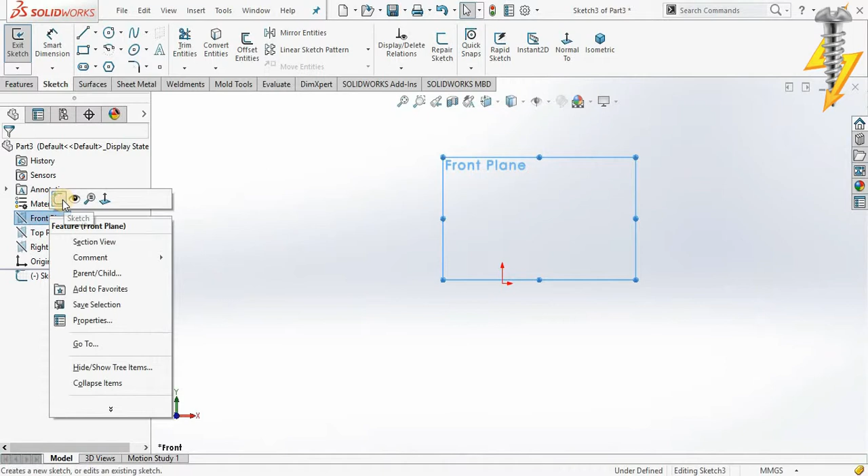After that, we're gonna draw the half shape of the mug, choosing a line and spline.

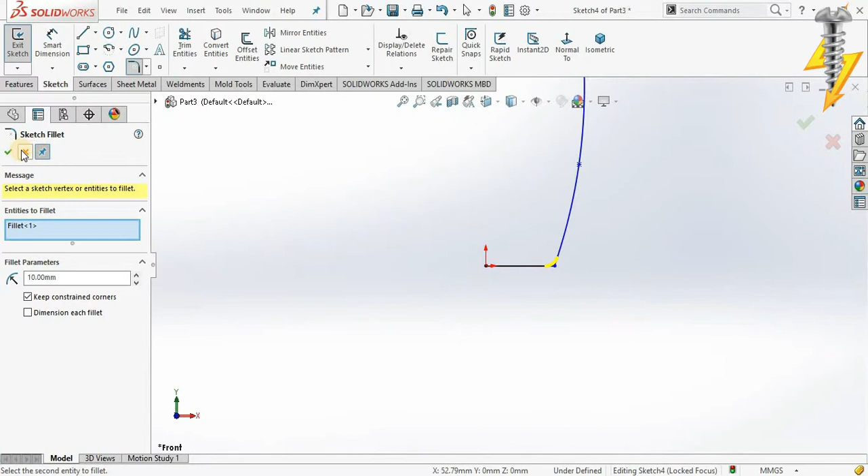We add the fillet here, then we go to the Surfaces feature. Now before that, we should make an axis of revolution.

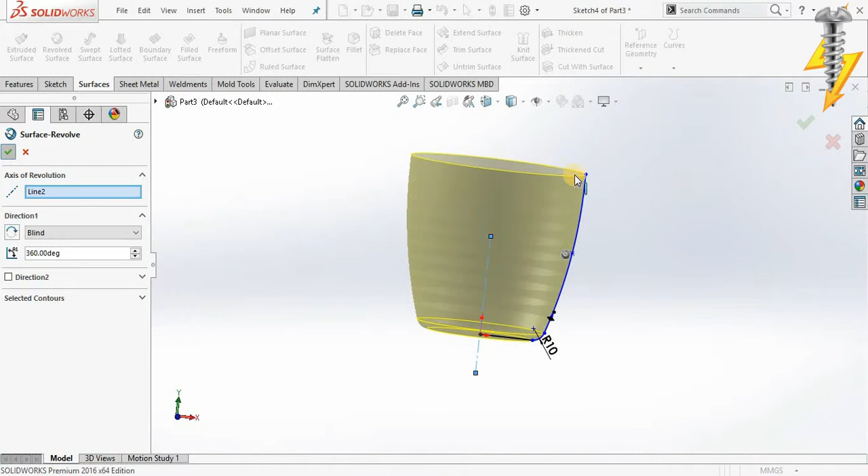To guarantee that the feature will work. Now we have the shape of the mug, but without the hand holder. What we're gonna do right now is add thickness to our design.

For example, 1.5 to the surface. Gonna be looking like that. Not bad.

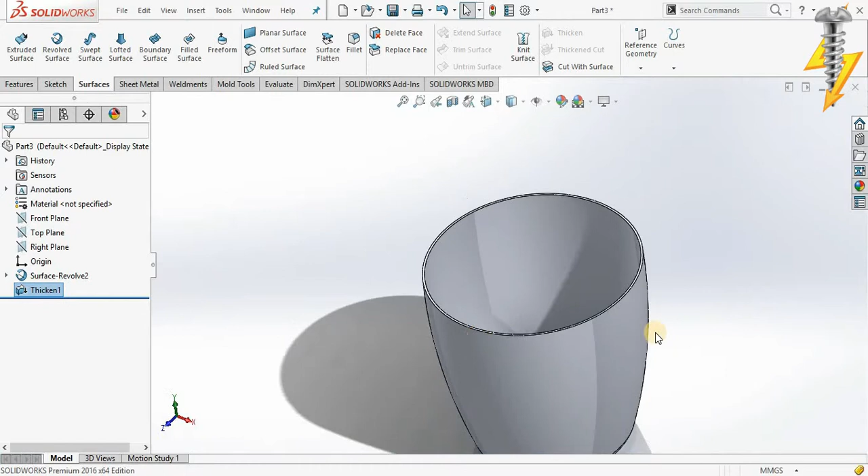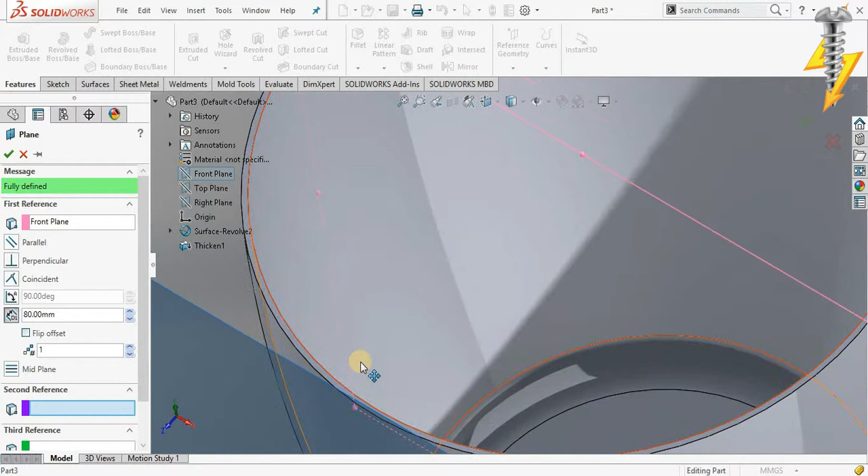Second thing, we're gonna add the reference plane. It must touch the surface. We're gonna know why after that.

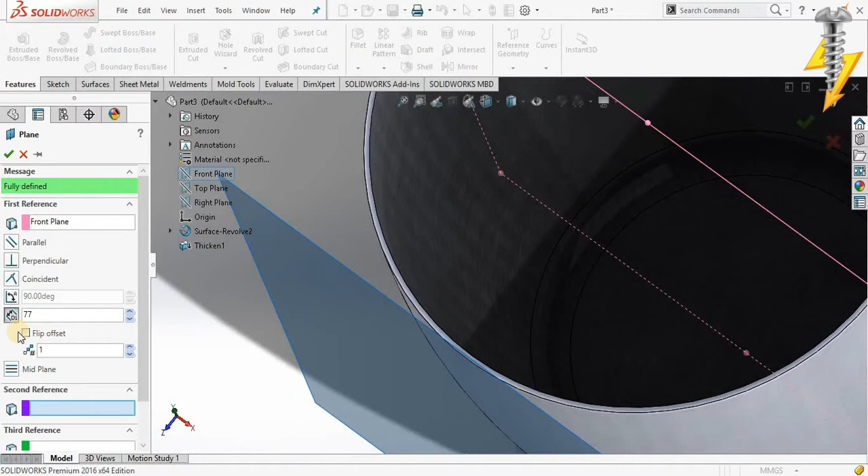17. Too much, 77. Is that okay? Not okay yet.

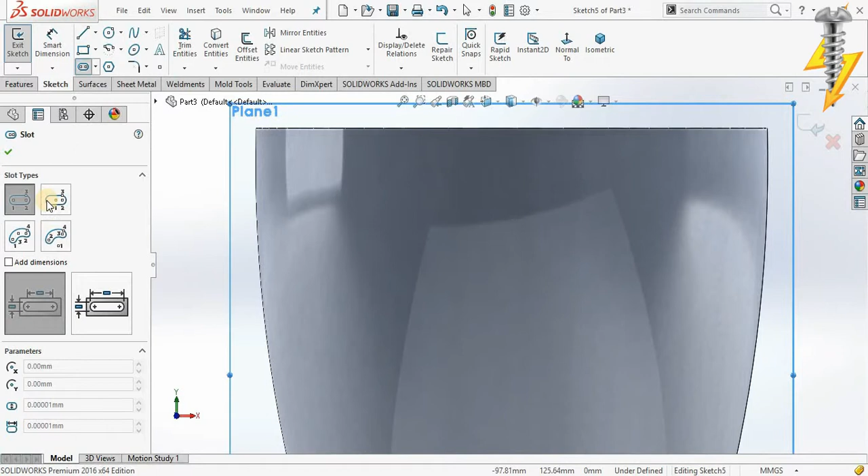When it touches the surface, I'm gonna open up Sketch and draw the shape of the hand of this mug. What we're gonna do is draw a slot from the center, like that. We go to Smart Dimension, we set 15.

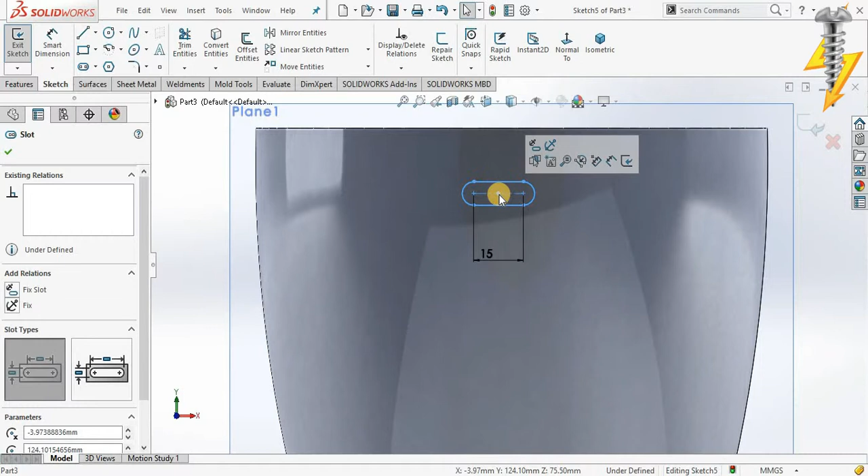We draw an axis, like that, and make this axis vertical.

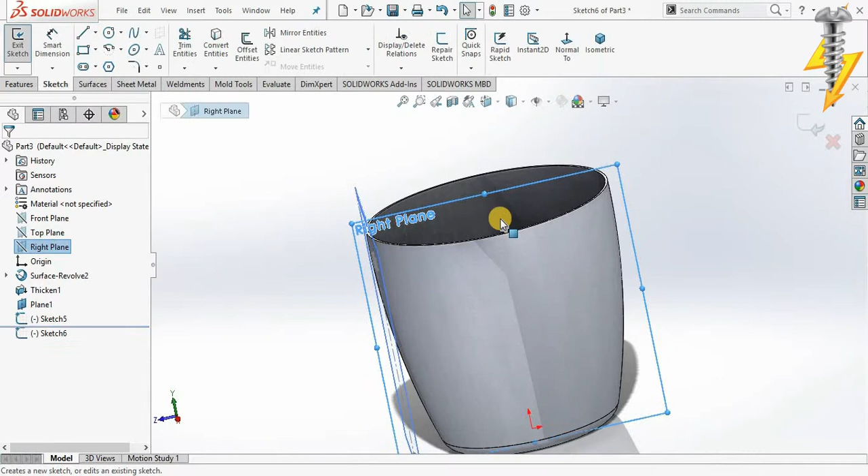The second part is to go to the right plane and draw a spline that gives the shape of the handle. Then make it coincident, like that.

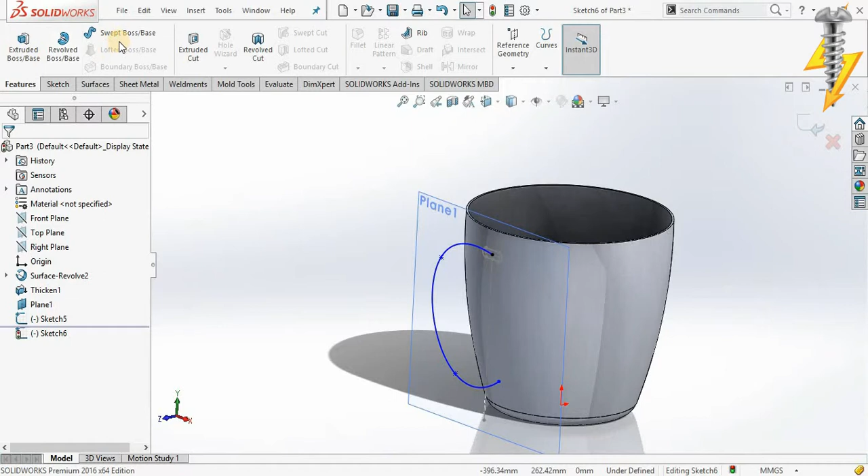Now we go to Features, Swept Boss. We select the profile, then the path. The result will be like that.

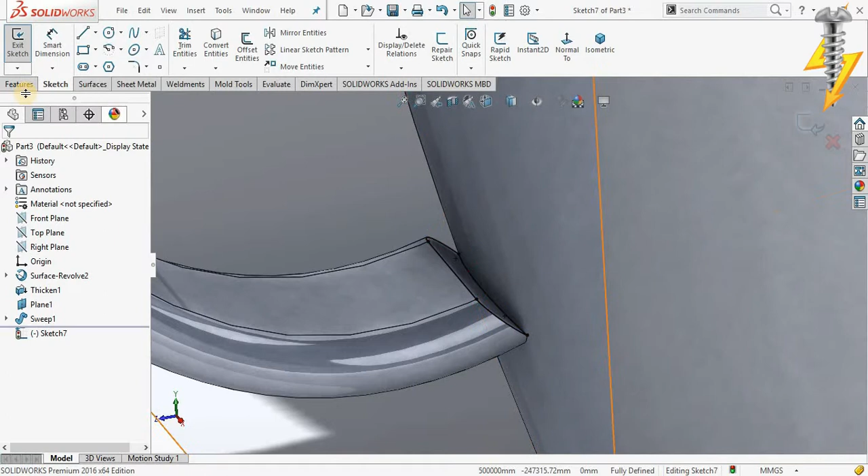I guess we have a little problem here, but we're gonna solve it by opening Sketch, then converting our entities, and we go to Features, Extruded Boss, and set it up to Next.

We set it invisible, hide it. Now we can add the fillet here by this amount.

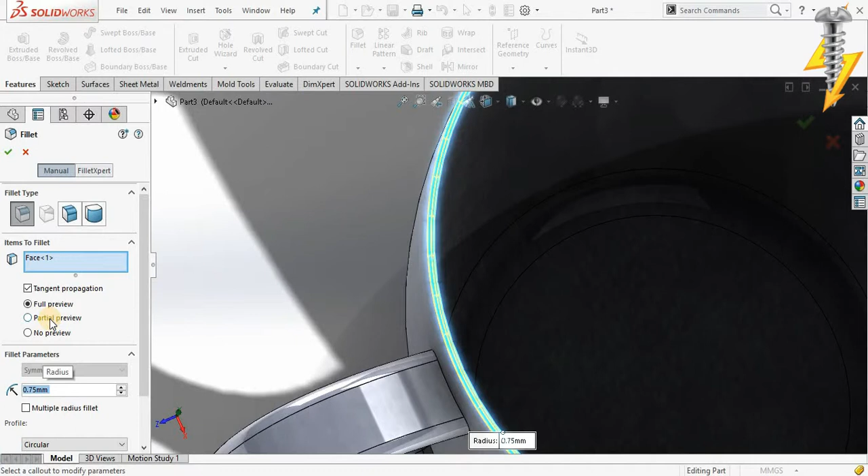And now we are okay with the mug. We can edit our color.

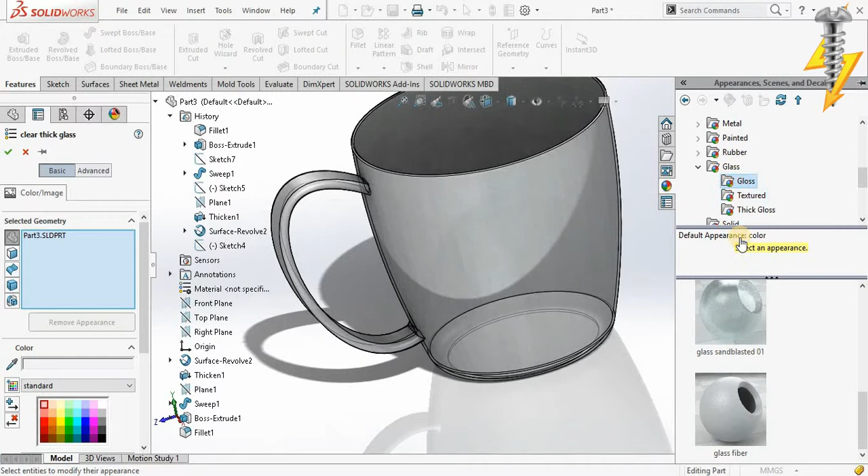We can increase graphics by removing this and adding a scene.

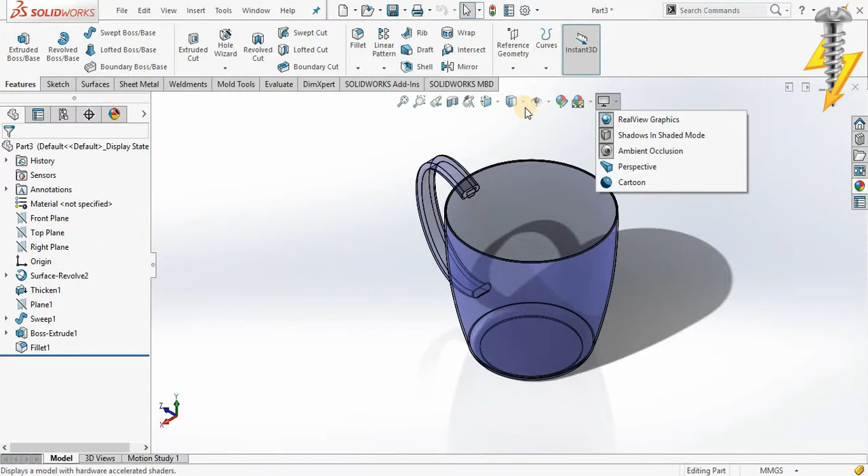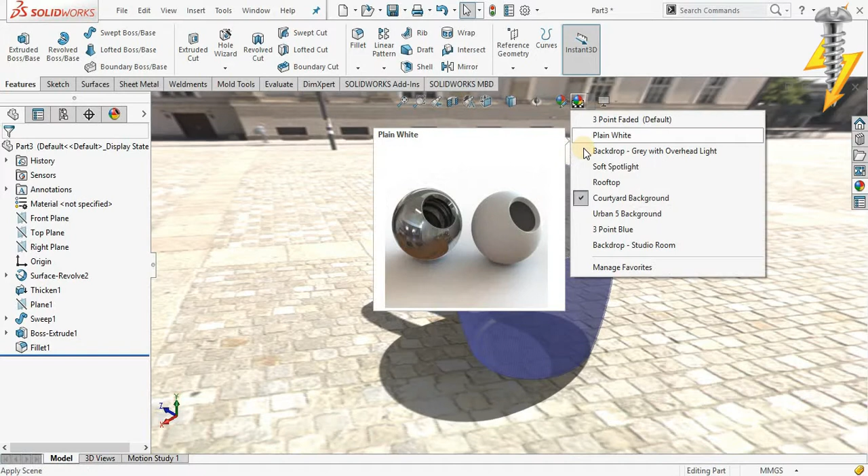The only thing that will define the real view of this mug is the lighting. Different scenes have different lighting, that's why you're gonna choose the most suitable one.